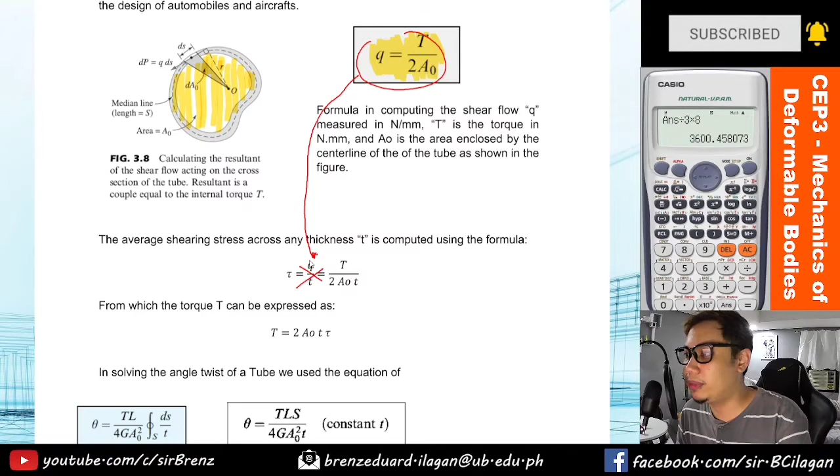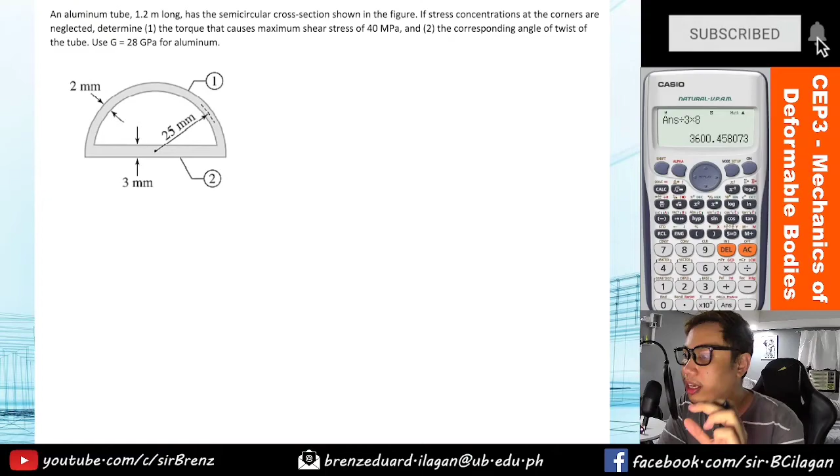Okay? So guys, because the shear flow is constant in a prismatic tube, the maximum shearing stress will occur in the thinnest part of the wall. So kung hindi maniwala, pwede mo namang i-consider din yung thickest o yung mas makapal na thickness ng iyong tube. Okay? Pero I'm sure that yung maximum shearing stress will occur doon sa thinnest thickness nung ating tube.

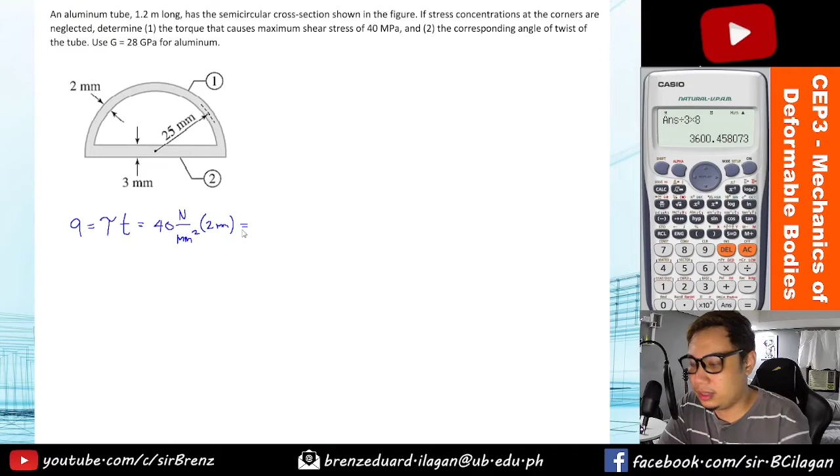Okay? So, again, knowing that the formula for shear flow is equal lang sa shearing stress or the torsional shearing stress multiplied by the thickness of the tube. Pero again, ang gagamitin nating thickness diyan is yung pinakamanipis, or the thinnest. So that is equals to 40 megapascal, which can be written also in Newton per millimeter squared, and then multiply by thickness. So yung 2 mm yung gagamitin natin. 40 times 2, that will be equals to 80 Newton per mm. Okay? So next,

given yung formula for T or the torque, that is equals lang sa 2 multiplied by A sub O, and then multiply by the shear flow na q. Okay? But ano yung A sub O natin o yung cross-sectional area enclosed by the median line? So guys, as you may notice, yung radius is sinukat coming from the center hanggang sa gitna ng ating tube. So in short, ito is yung mean radius natin.

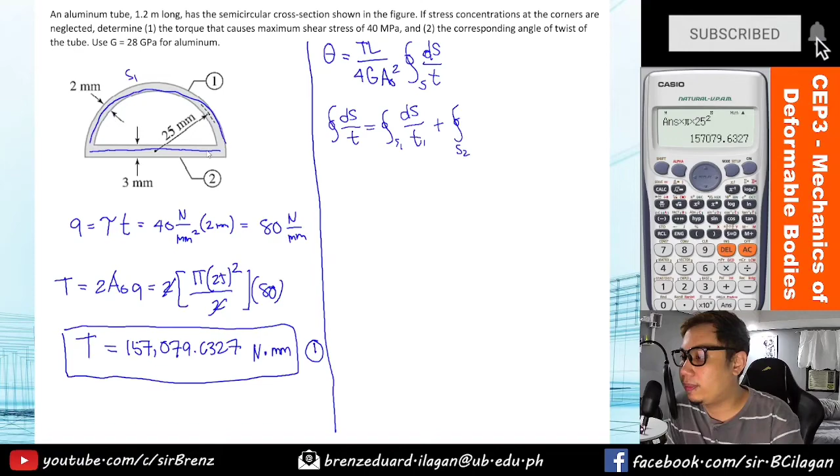O, ano nga yung S natin? So, that is the median line or yung haba nito. And then, ito yung S sub 1. And then, yung S sub 2 is ito. Okay? So, ds all over t sub 2. Okay, so since constant nga yung ating thickness, pwede naman natin siyang i-factor out na. Or that can be written also as

1 over t1, the surface integral of ds, plus 1 over t2 times the surface integral sub 2 of ds. Okay? So if you're going to take the integral of that, so that will be equals lang sa S sub 1 over T1 plus S sub 2 over T2. Okay? So next, S1 and S2 nga are the length of the median line for part 1 and 2. Yun yung itong portion na to.

Therefore, yung equation na yan, equals lang din siya saan? Itong ds over t. So, unahin natin tong S sub 1. Ito, paano nga natin siya mako-compute? Using the equation or the figure. So, knowing that yung radius natin is 25. So, kalahati lang ng circumference, diba? Or that is 2 pi r over 2. Or that will be pi r na lang. Kasi dinivide mo na sa 2 yung circumference ng circle. Kasi kalahati lang yan. So, pi r.

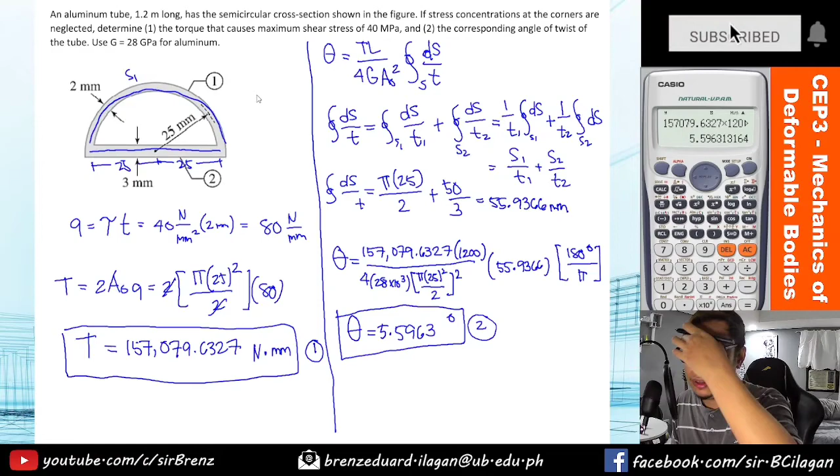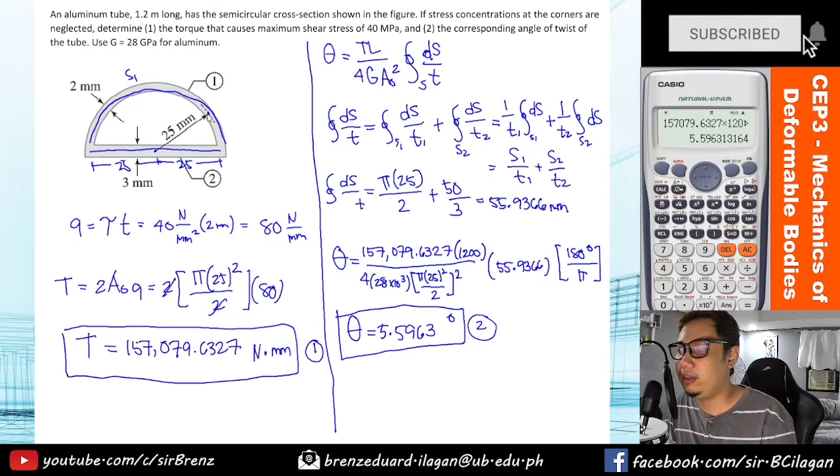So madali lang as long as you know the formula, direct substitution lang naman siya. Basta alam mo yung bawat variable sa given equation kung ano yun. For example, ito, area enclosed mula sa gitna ng iyong tube. So ang kino-consider laging radius is from the center point hanggang dito sa gitna ng iyong thickness. So ito yung enclosed. And then when we talk about S, yan yung median line o perimeter lang nitong ina-enclose nung area enclosed. Okay?

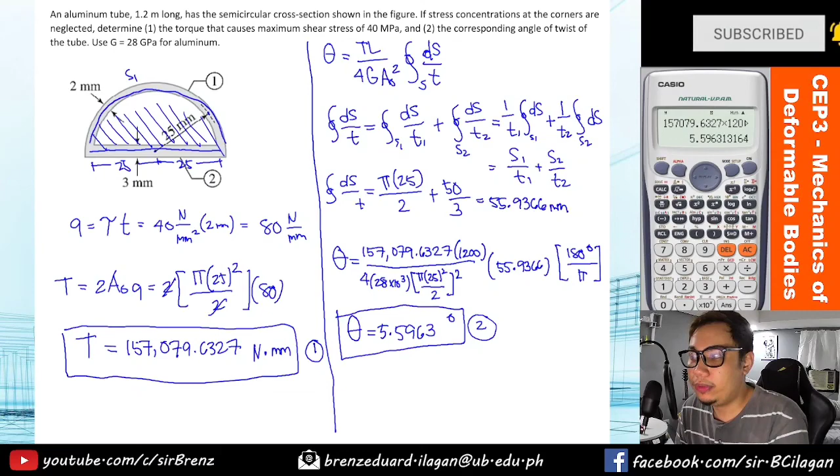Okay guys, so let's proceed with the next topic under the module na torsion.